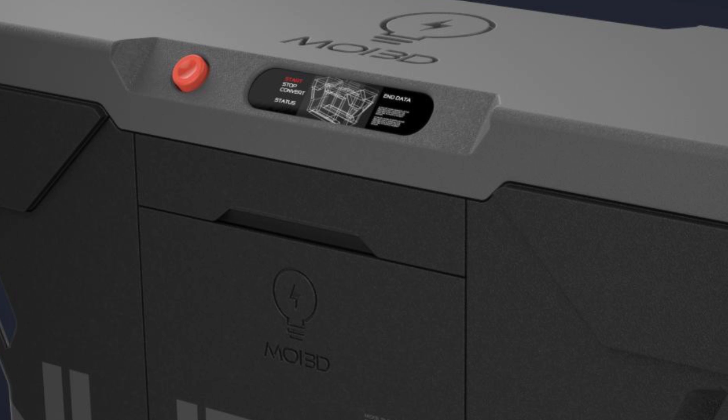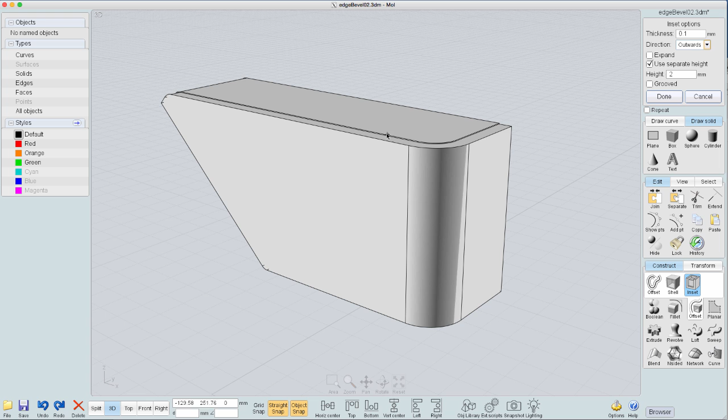At the beginning of this one, we're going to extend some of these parts and grow out the section. I'll select these parts and do an inset. Notice there's a thickness there in that inset. If I use a separate height and set it to 2, I'll get this thickness exactly the way I want. So I've done one, delete that one.

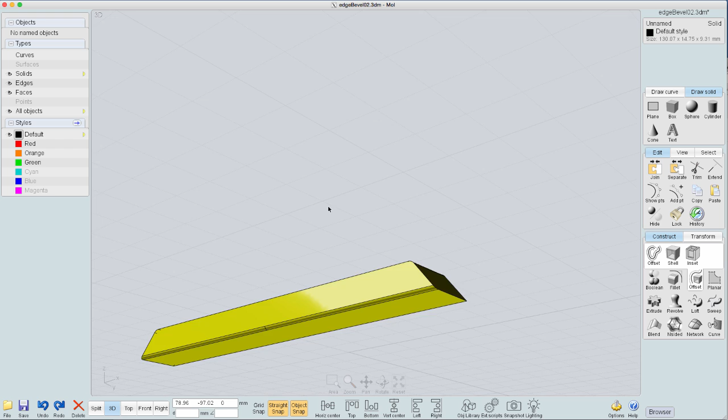Let's do this one too. I'll select the actual surfaces I want to offset and do the same exact thing again, use the same settings, and there it is. It popped it out, and now those two things are set out. I'll use this one, select the surfaces, offset it, and we're good. So now we have that.

Now I need to delete all of these other parts that weren't offset. Once I've deleted them, I just mirror the new parts over to the right place. So once I've done that, I've got that part fixed.

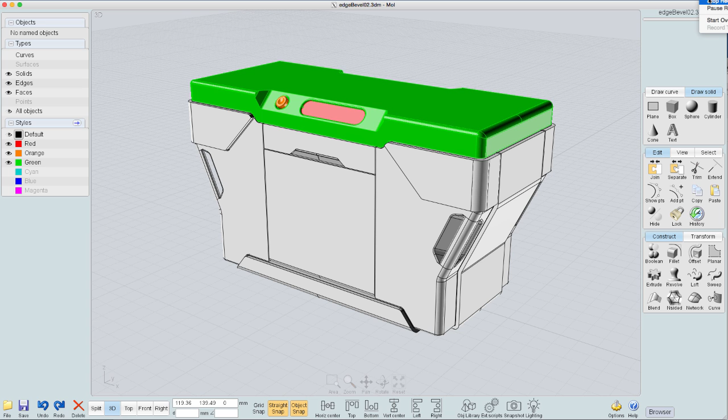Now the next part I want to show is embossing a logo. In this case, we're going to use the new custom Moi3D logo that I created. Here it is, shrinking it to match the actual top size.

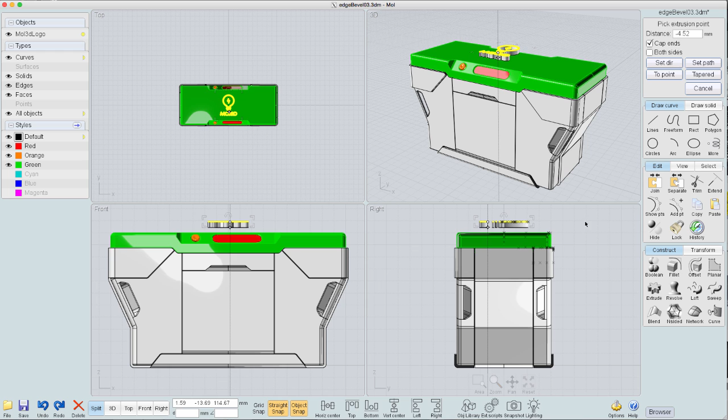I imported it and I'll move it to the top here, then hit the E key to extrude, drop it down a little bit, and hit the minus key to hide the curves. Now I'm going to drop it down, using the translate button. Sometimes for me it's just easier to hit the translate button. So there, I've got that.

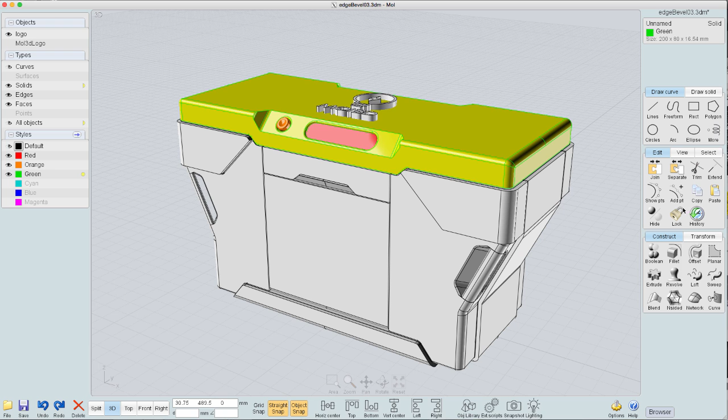I can see through that it's about where I want it. I'll name it so it's easy to select. Now I go here and say Boolean, then select it right over there on the left. Once selected, I can apply the Boolean.

Now we don't have the right colors, so let's select the surface. But now we have a solid at the top there. I'm going to do the exact same thing on the front.

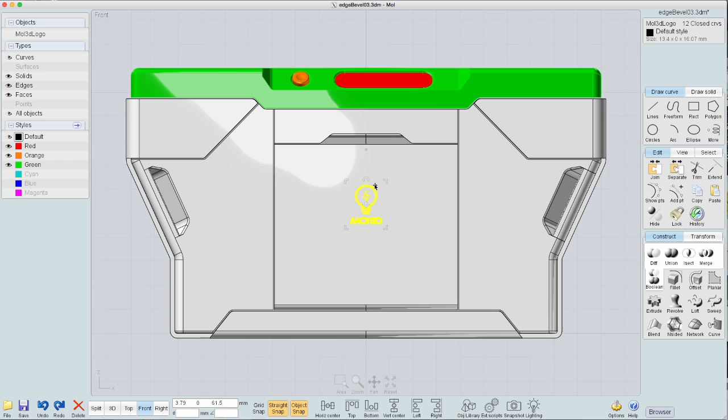I want to create the logo, move it down, and rescale it. Those little handles are great for rescaling. I have to say, I love that.

Then I'll go to a view using the arrow key here, just using it to move it down, and then I'll hit the E key to extrude. You'll see what happens—I'm extruding it into the surface just where I want it.

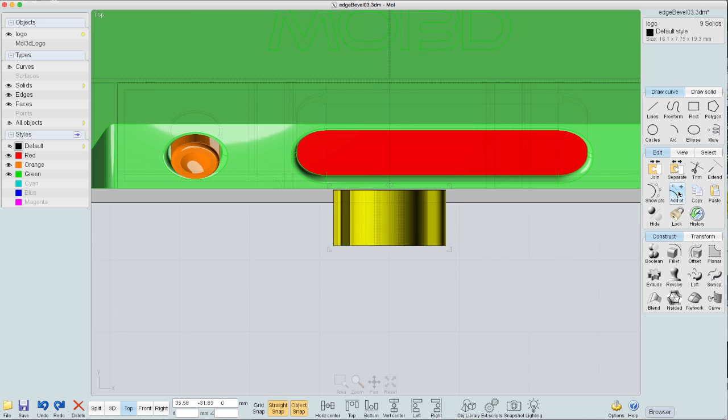I want to do a Boolean subtract at this point. First I'll name it like I mentioned earlier, then do the Boolean subtract. When I do it, you'll see it didn't do anything, and that's because it was seeing a thicker piece above.

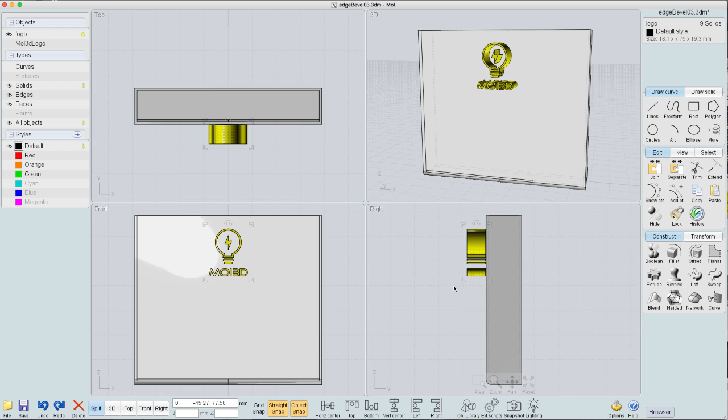If we look at it and zoom in, we'll see we're not really where we want to be. Let's zoom up on this, isolate that surface, and zoom up on it. Now I don't want to go all the way through, so I can tap my arrow key to go there.

Now once I've got that done, let's turn off our splines. You'll see that I did the correct Boolean subtraction, and now I have a great logo.

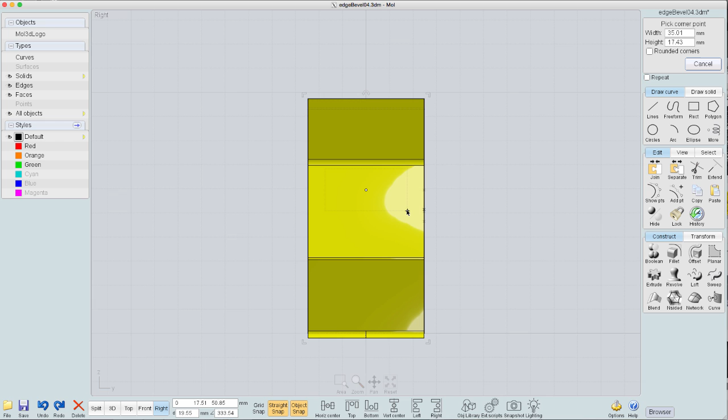Now the last thing I want to do is insert some handles. If you'd seen the tutorial earlier on how to do this kind of treatment, you'll see how this works. Notice I'm doing a trim here, and it didn't trim that surface—that's because it's back behind it.

Now when I do a trim, it will trim it. Okay, good, so now I'll delete that. Actually, before I do that, let's go ahead and create the correct radiuses for those handles.

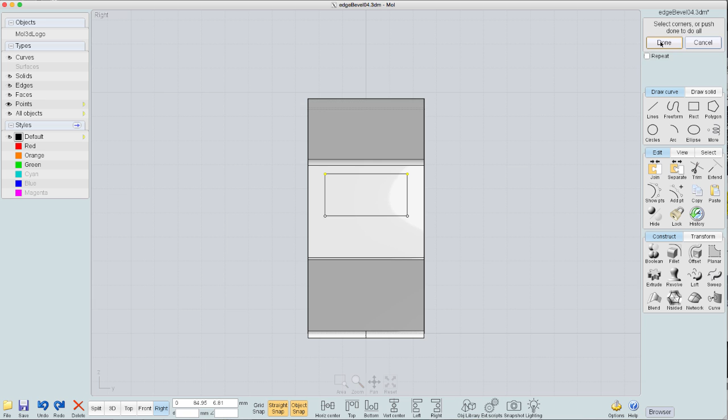Okay, now let's do it again. Select that one surface and then do a trim. Now we just select that one surface. So now we have that.

We're going to shrink the trim surfaces on that, and I'm going to tweak it a little bit inside. I have to get this so I know the blend is going to work correctly by shrinking that inside like that. Now I'm going to take this.

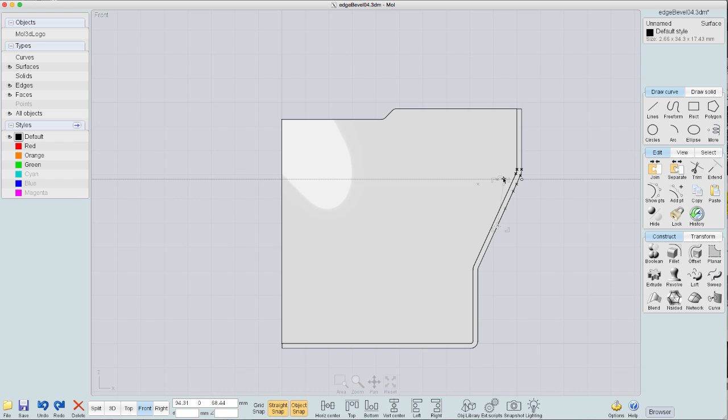You can see I'm angling it back, and it's perfectly level, but I want to push it up a little bit. There, I dragged it up. It's a little too high there.

That's about right. So now that I've got that done, what I really want to do next is select the edges for each one of these surfaces. Remember that blends need surfaces to edge—it can't just use bare edges.

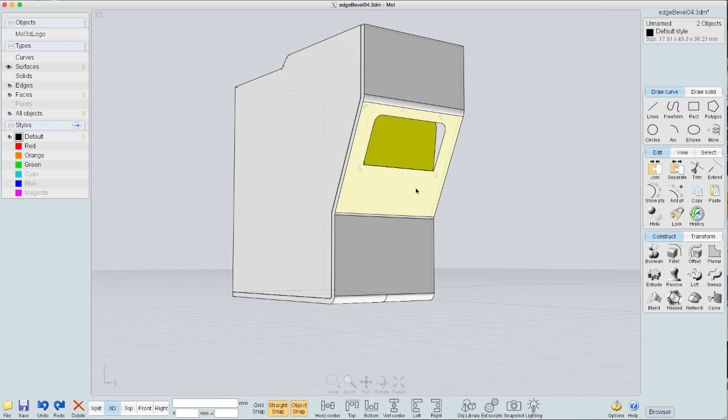So I'm going through, I select these, and select all 4 edges, which I didn't do in my tutorial before, but that will keep me from getting that little sliver that I had to deal with before. So there's my perfect blended little handhold for the side of this device.

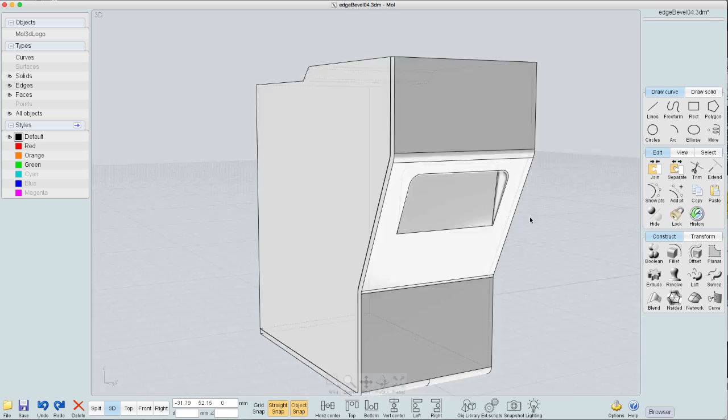And if I group all this stuff and union it, you'll notice that now I have a solid. So now that we have the solid, it's real simple to mirror that to the other side of it, delete that, mirror, and we're done.

And then really all I need to do now from here is just go into Keyshot. And in Keyshot, I set up some materials and do a little texture mapping, and there you have it.